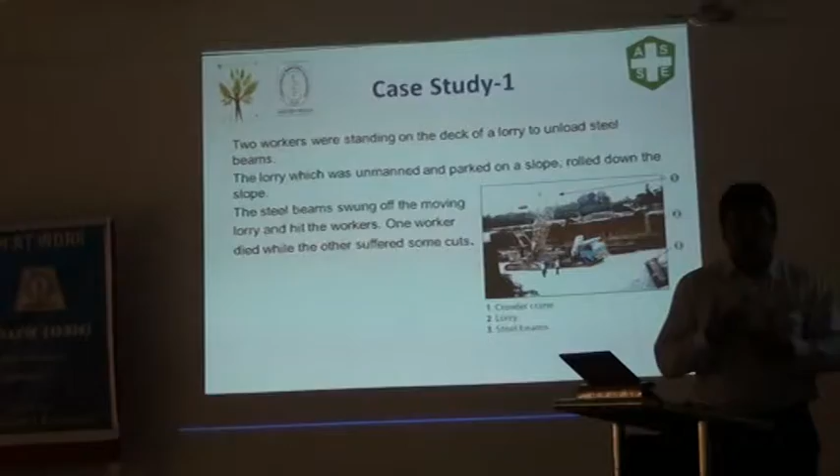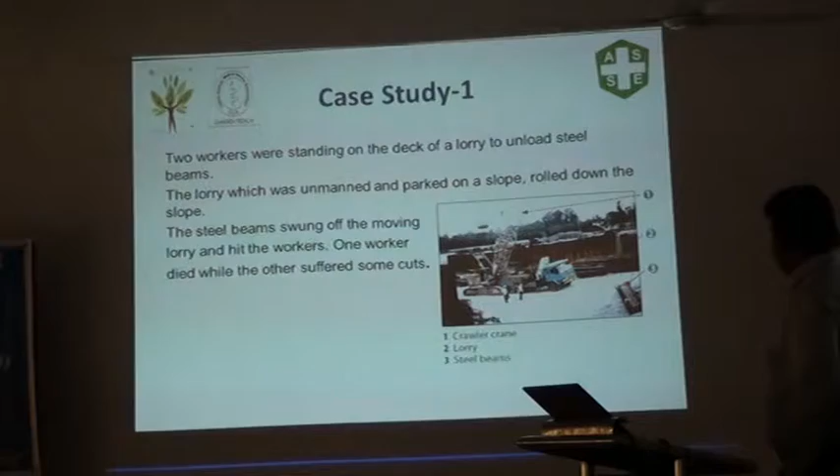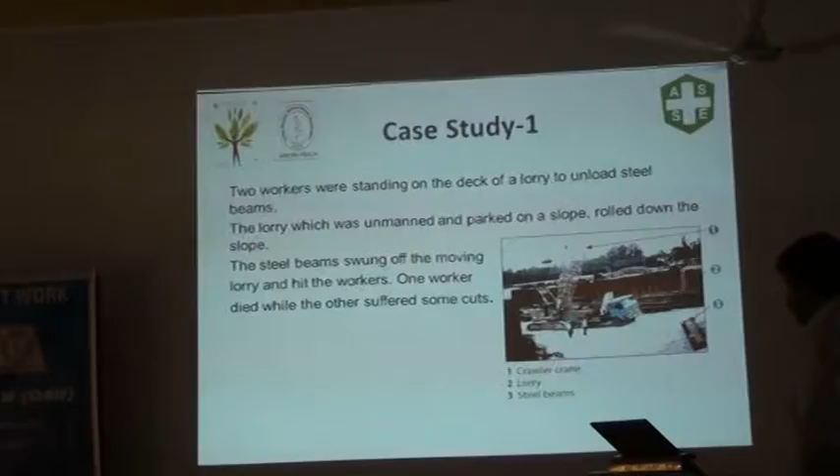Two workers were standing on the deck of a lorry to unload steel beams. The lorry, which was unmanned and parked on a slope, rolled down the slope. The steel beams swung off the moving lorry and hit the workers. One worker died while the other suffered some cuts. You can see similar types of incidents in our day-to-day life.

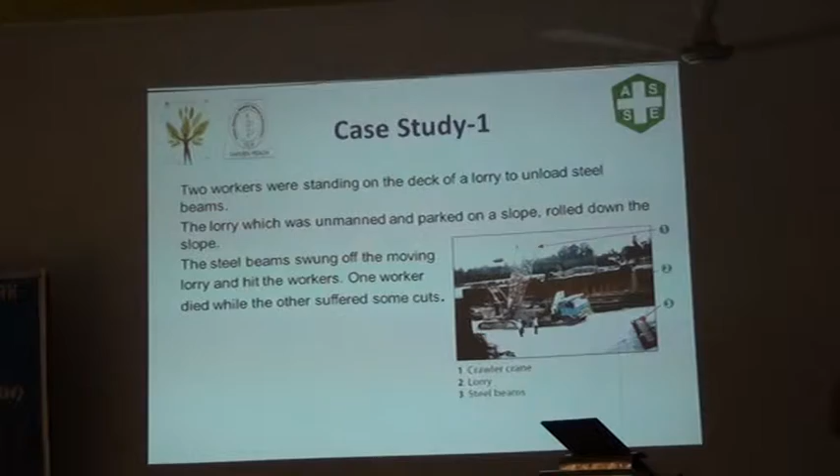So looking at the incident, I ask the group to discuss among yourselves and please let us know the basic cause and the root cause. You have to follow proper mechanical handling practice. Now I give 5 minutes. Rather than individual perceptions, I want the group's collective perceptions or thoughts. That gives more impact.

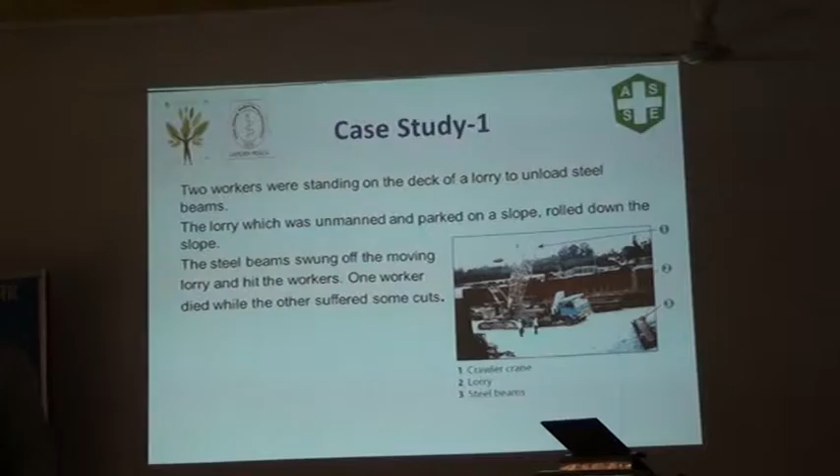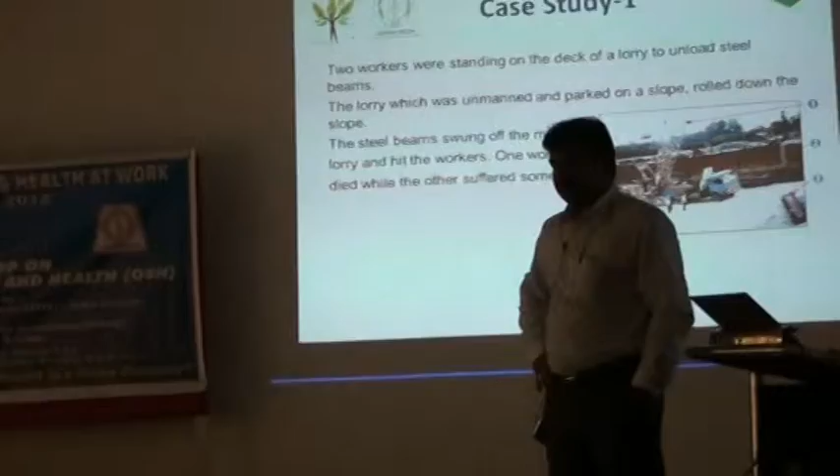Actually, when we adopt the practice, can we provide the same alertness of the worker? In mechanical handling, one practice can be superior to the other. For example, we use forklift trucks while unloading the beams, where the driver is safe, the lifting and lowering mechanism is improved, and the beam can be unloaded. Here, even a half-conscious worker can do it. By the very nature, the design of the forklift itself prevents the accident.

But one point we noted here is that there is a rolling accident, rolling out. That indicates the second point: the lorry was unmanned and parked on a slope. A signal man or a wheel stopper should be provided while parking. Right, wheel chocks and brakes. Precautions have to be taken while parking the lorry. They should put some sort of wheel chocks so that it could not roll.

Probably we are jumping to the conclusion. First of all, root cause is what he asked. Precautions have to be taken while parking the unmanned lorry, because some type of stopper should have been put on the track so that it does not roll down, even though it is unmanned.

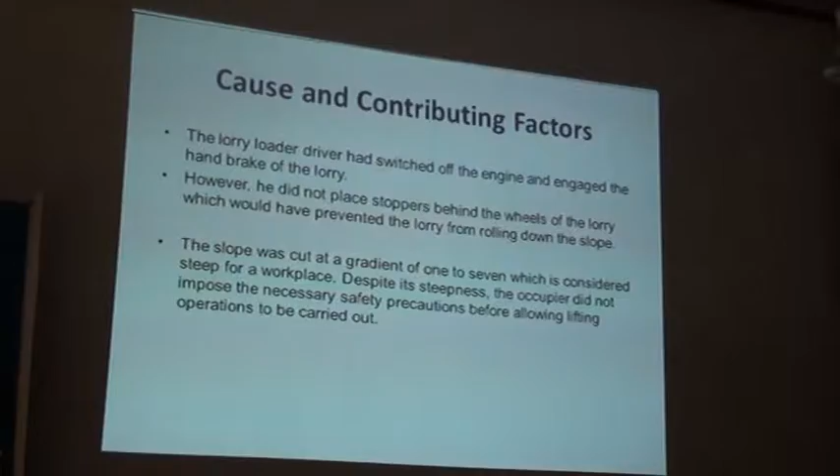I'll give a case study on this. When I was working in the earlier industry, people used to apply the handbrake after switching off the engine, and they did not provide the wheel chocks or the stoppers. And the place where he parked was a slope. The driver went into the truck and tried to start the engine, but because of the choke, the air blockage, it didn't happen.

It doesn't start. He released the handbrake and put the gear in the neutral position, so it ran backwards and hit the compound wall. Fortunately, nothing happened to the person. So this is the other case. The slope was cut at a gradient of 1 to 7, which is considered steep. Despite its steepness, the occupier did not impose the necessary safety precautions.

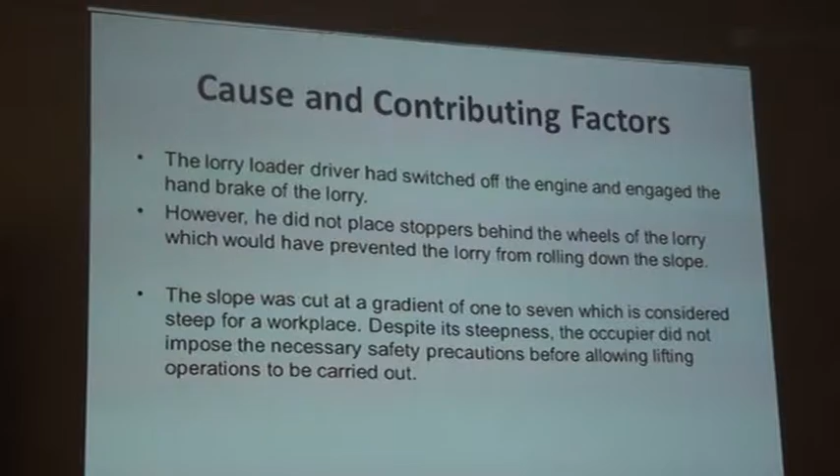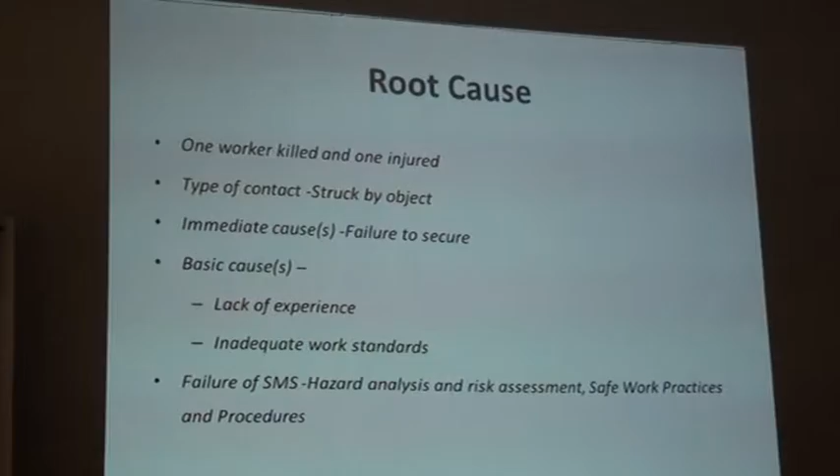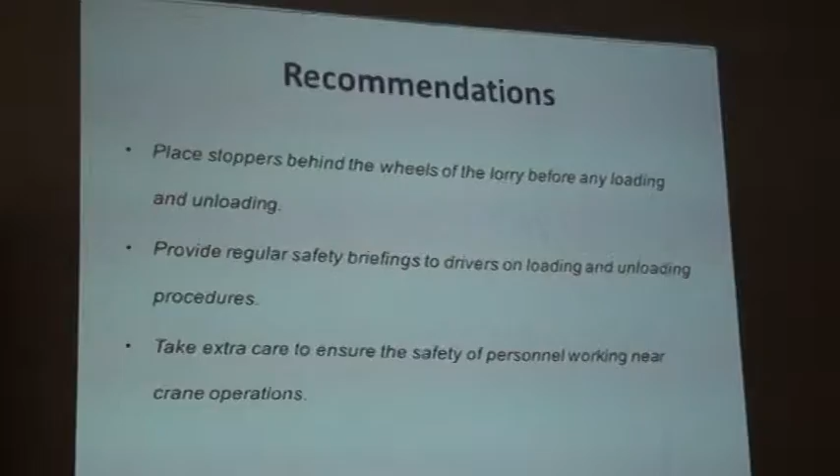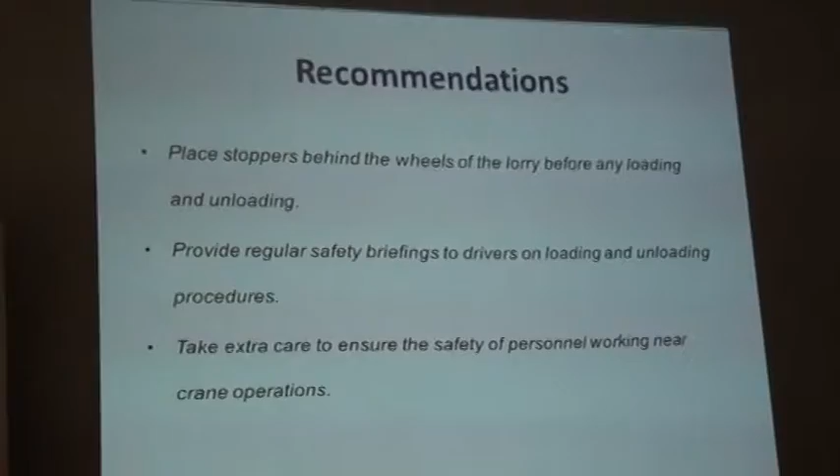So recommendations: place stoppers behind the wheels of the lorry before any unloading and loading takes place. Provide regular safety briefings to drivers on loading and unloading procedures. Take extra care to ensure the safety of the personnel working near crane operations. I'm just giving a thought on how the accidents can happen. Okay. The second is for group 2.

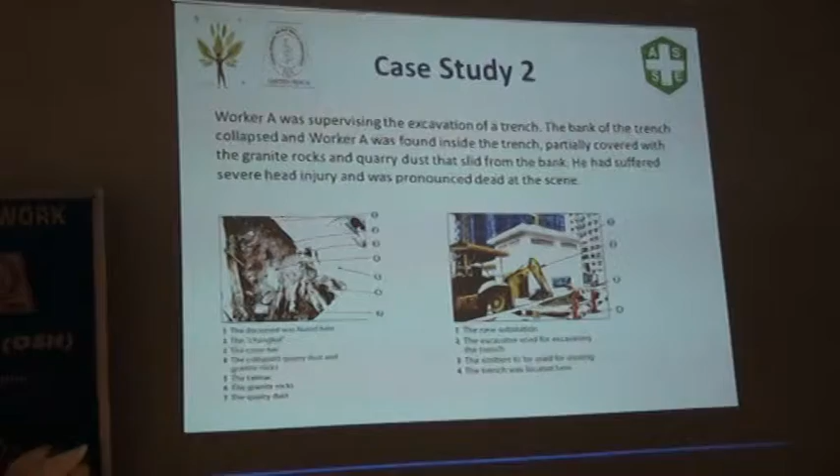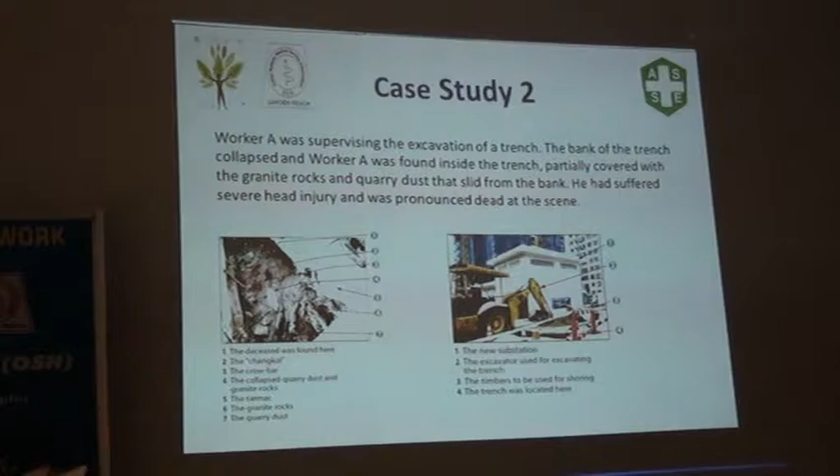This is the excavation work, where worker A was supervising the excavation of a trench. The bank of the trench collapsed and worker A was found inside the trench, partially covered with the granite rocks and quarry dust that slid from the bank. He had suffered a severe head injury and was pronounced dead at the scene. What were the basic causes? The root cause? Group 2.

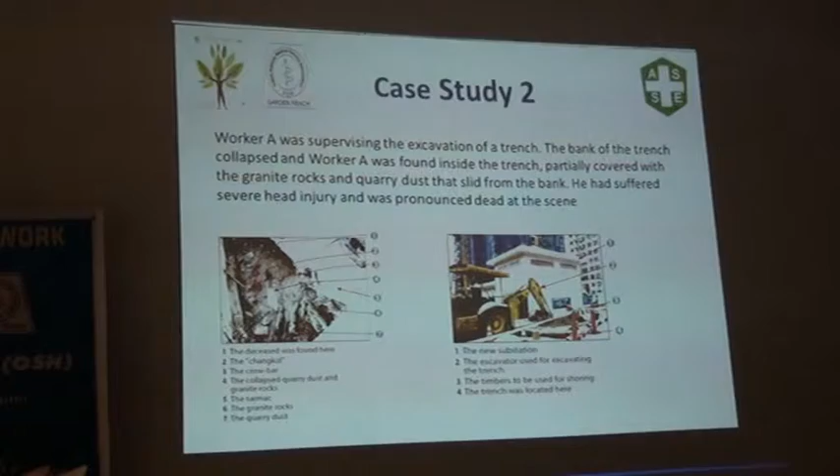You can discuss among yourselves. Yes, soil may be one reason. Soil. A collective decision can be taken.

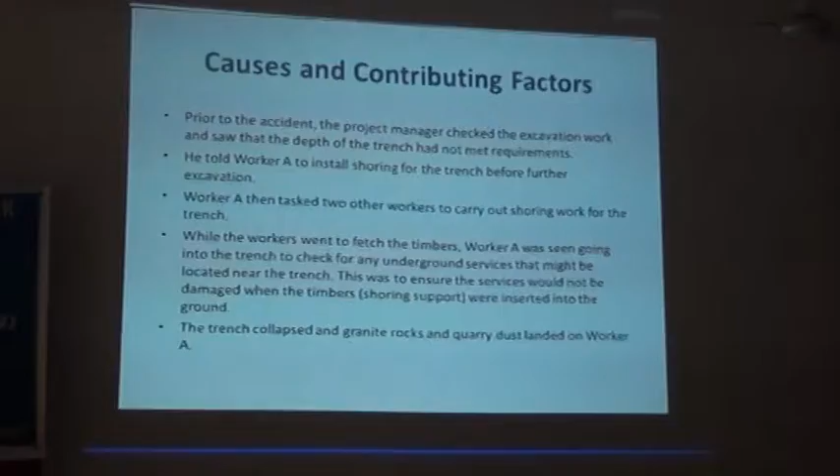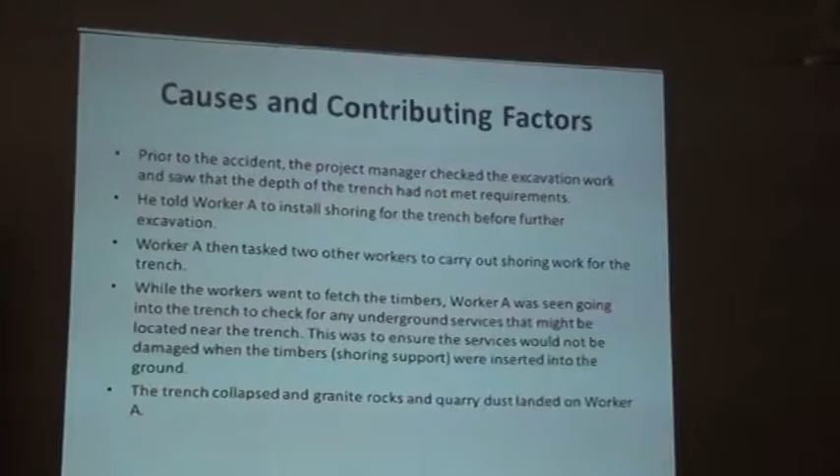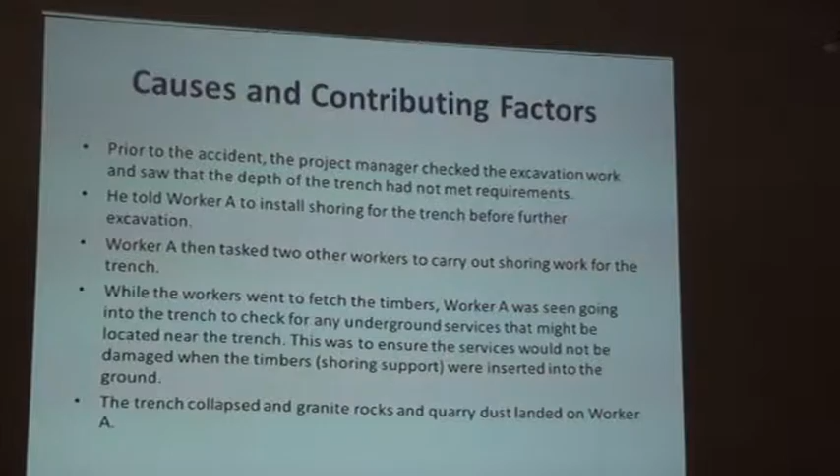Prior to the accident, the project manager checked the excavation work and saw that the depth of the trench had not met the requirements. He told worker A to install shoring for the trench before further excavation. Worker A then tasked 2 other workers to carry out shoring work. While the workers went to fetch the timbers, worker A was seen going into the trench to check for any underground services, to ensure they would not be damaged when the timbers were inserted.

The trench collapsed and granite rocks and quarry dust landed on the worker. So this is the cause. And look at the hint about the underground services. One suggestion I always give: whenever we go for an excavation, we need to check the underground utilities. A permit is required, and checking of the underground utilities is a mandatory requirement nowadays.